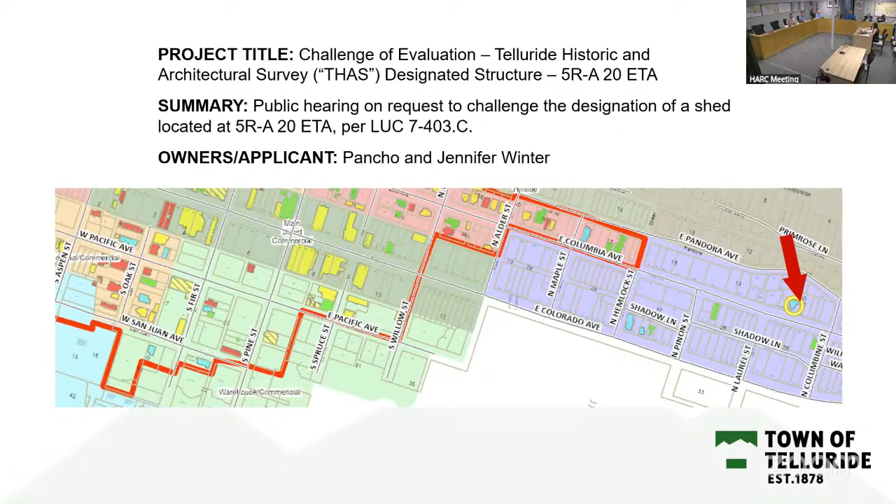The owner applicant is Pancho and Jennifer Winter. I'll quickly remind us of the procedure for a challenge of evaluation since we infrequently see these, so the public is informed. It's outlined in section 7403 of the Telluride Land Use Code. A challenge of evaluation letter was initiated by Pancho and Jennifer Winter on 4/16/25 for lot 5RA block 20 ETA per Land Use Code 7403A. Following a request to challenge an evaluation, HARC must hold a public hearing and schedule a site visit prior to the meeting per Land Use Code section 7403C. We held that site visit, as Mark mentioned, at 3 o'clock this afternoon.

Per mutual agreement, the applicant agreed to this item coming before you this evening, and it was properly noticed. Per Land Use Code section 7403D, the person challenging a designation shall have the burden of presenting evidence substantiating the challenge. Staff or any interested citizen may also present evidence as to why the evaluation of the structure should or should not be changed. At the public hearing, staff or any interested citizen may also present additional evidence within 15 days after the date of the public hearing, but most likely this evening. HARC shall make a recommendation to town council on whether or not to amend the evaluation based on the criteria set forth for evaluation of structures in the 2013 THAS.

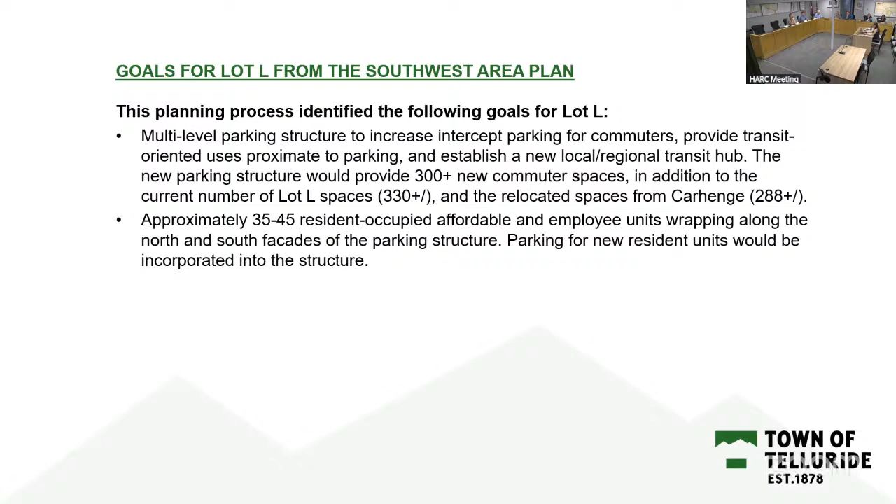In addition, approximately 35 to 45 resident occupied affordable and employee units wrapping along the north and south facades of the parking structure. Parking for new resident units would be incorporated into the structure itself. In addition, a childcare facility and associated outdoor play area.

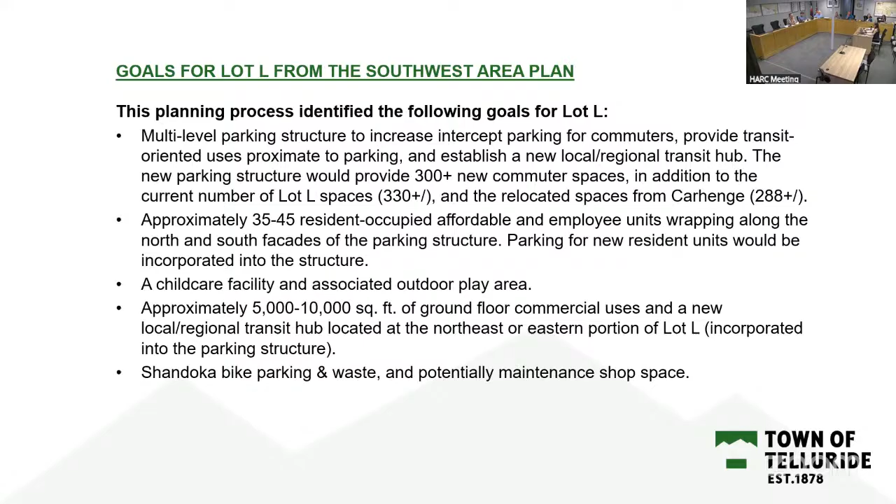In addition, approximately 5,000 to 10,000 square feet of ground floor commercial uses and a new local regional transit hub located at the northeastern portion of Lot L, which is incorporated into the parking structure, and Shandoka bike parking and waste and potentially maintenance shop space. And finally, amenities such as playgrounds, pocket parks, and public spaces.

So land use code compliance—a formal land use code compliance review will take place following the submission of a complete formal HARC application.

Prior to this work session, staff reviewed land use code requirements with the applicant specific to the accommodations zone district in depth, to ensure the applicant is taking land use code requirements and constraints into account at this preliminary conceptual stage of project design.

So we're going to focus this evening on the design guidelines. As a reminder, the overall precepts: keep it simple, keep it in scale, respect the historic resources, make all new design compatible to the existing context.

And again, we are located in the accommodations, River Park Corridor overlay, and exterior and site lighting standards and guidelines sections, in terms of what I will present to you.

For this work session, as for all work sessions on this proposed project, while it is still in the preliminary conceptual design phase, the aim is to really focus on the design guidelines that are particularly pertinent at this early stage of project design.

I provided in the staff memo the most relevant specific design guidelines, and it's more extensive than that. I covered a number there just so you would have the opportunity to reflect on some of the higher, most relevant design guidelines prior to coming into this meeting.

I'm just going to touch topically on some of those that I think will be important for you to consider. Then the applicant will present the project itself, and you will be thinking through during the work session the application of those design guidelines.

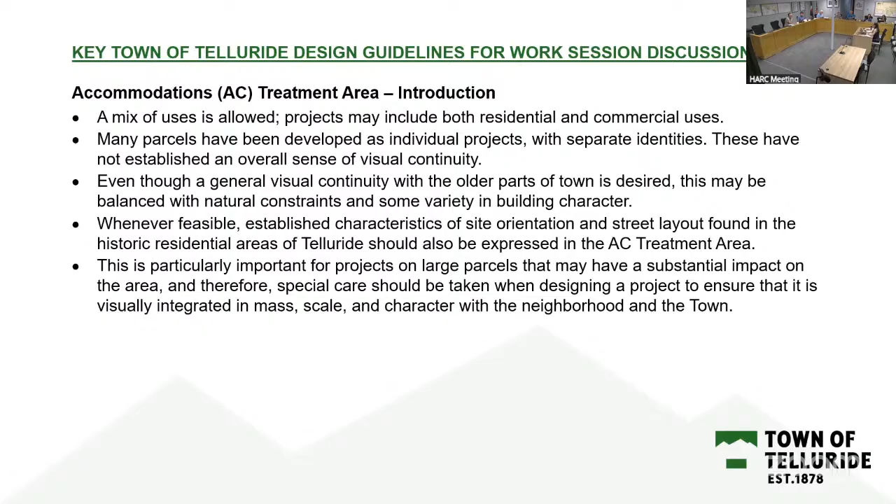This, as noted in the design guidelines, is especially important for projects on large parcels such as this one. This is quite a large parcel that may have a substantial impact on the area, and therefore special care should be taken when designing the project to ensure that it is visually integrated in mass, scale, and character with the neighborhood and the town.

Also noted in the design guidelines, as seen from a distance, the accommodations treatment area should appear to be part of the community, with essentially the same perceived street and alley arrangements, building forms, and scale of development.

This is particularly important for projects on large parcels and that span several parcels. More variety in architectural design is appropriate than in other areas, but should maintain visual continuity with the historic district. So that's just the overview of this treatment area and the flexibility within it.

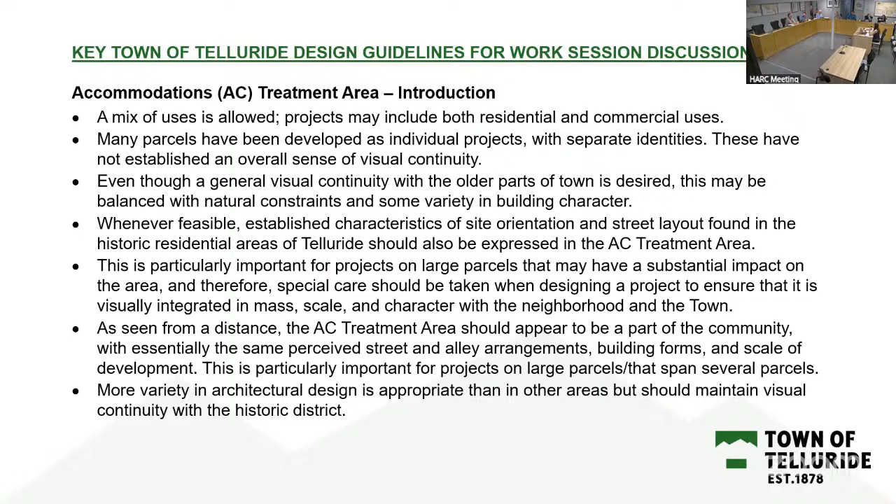I'm not going to go one by one through what I put in the memo. I'm just going to flag topics and some key points to make them fresh in your mind for the work session. So within the design guidelines, the parking design section notes that parking facilities should be located such that they are subordinate to other site features.

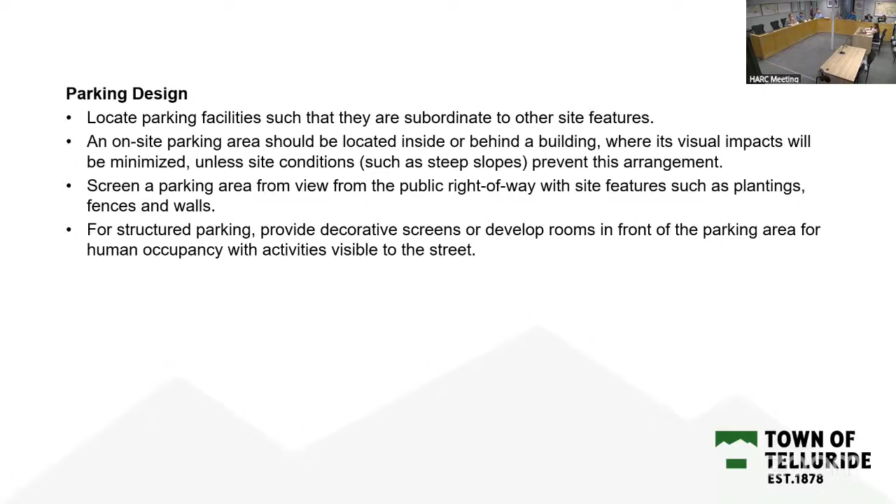An on-site parking area should be located inside or behind a building where its visual impacts will be minimized, unless site conditions such as steep slopes prevent this arrangement. The guidelines note that screening a parking area from view from the public right-of-way with site features such as plantings, fences, and walls is important. For structured parking, provide decorative screens or develop rooms in front of the parking area for human occupancy with activities visible to the street.

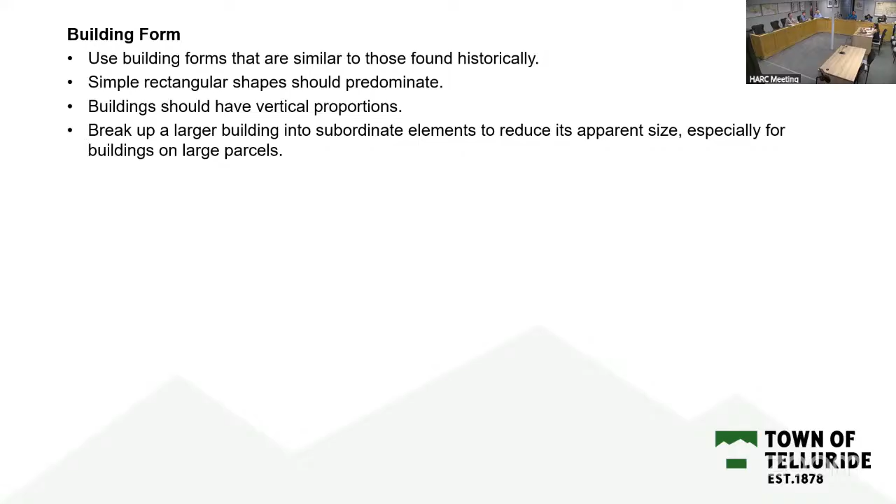So thinking through building form, I'm just pulling out some key points that relate to this evening's discussion. Use building forms that are similar to those found historically. Simple rectangular shapes should predominate. Buildings should have vertical proportions. Break up larger buildings into subordinate elements to reduce its apparent size, especially for buildings on large parcels. Provide articulation in the wall planes to break up mass and scale.

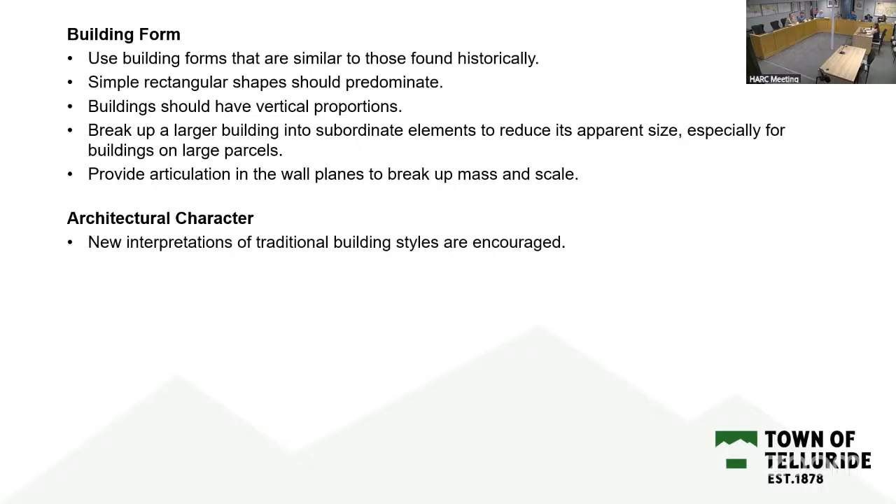For architectural character, some key design guidelines: new interpretations of traditional building styles are encouraged. New designs shall draw upon the fundamental traits of historic buildings without copying them. This will allow them to be seen as products of their own time, yet compatible with their historic neighbors. Applying highly ornamental details that were not a part of building in Telluride is inappropriate.

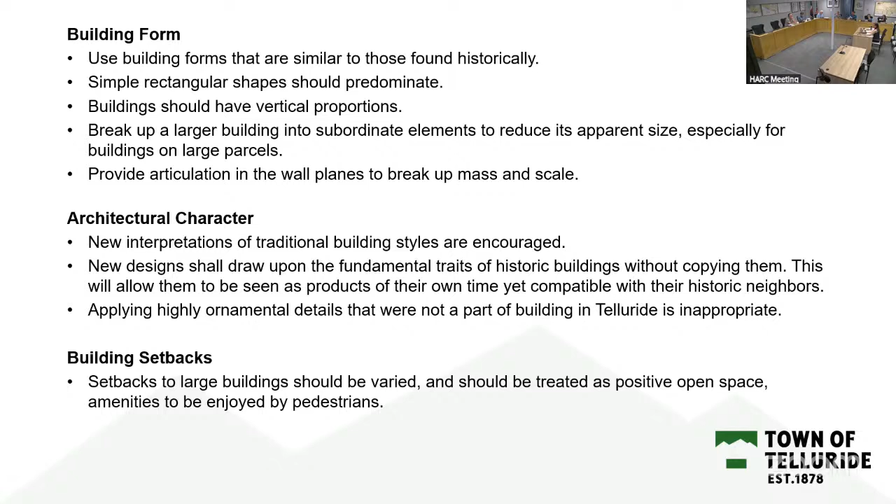And building setbacks: setbacks to large buildings should be varied and should be treated as positive open space, amenities to be enjoyed by pedestrians. So those are a few, and now I'm going to get into just a handful more, and then some big picture items.

Relationship to the town grid: I said this at the very beginning, respect the established town grid in all projects. Pedestrian scale: develop the ground floor level of all projects to encourage pedestrian activity. Provide amenities that will encourage pedestrian activity through the area.

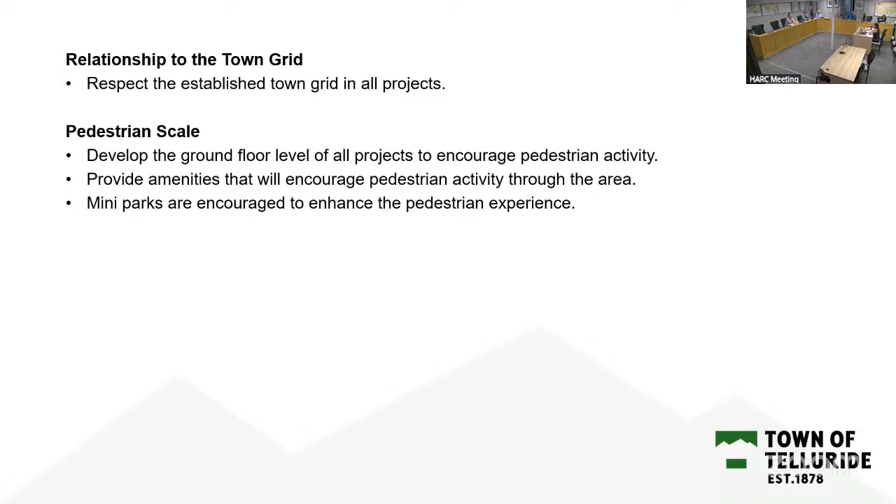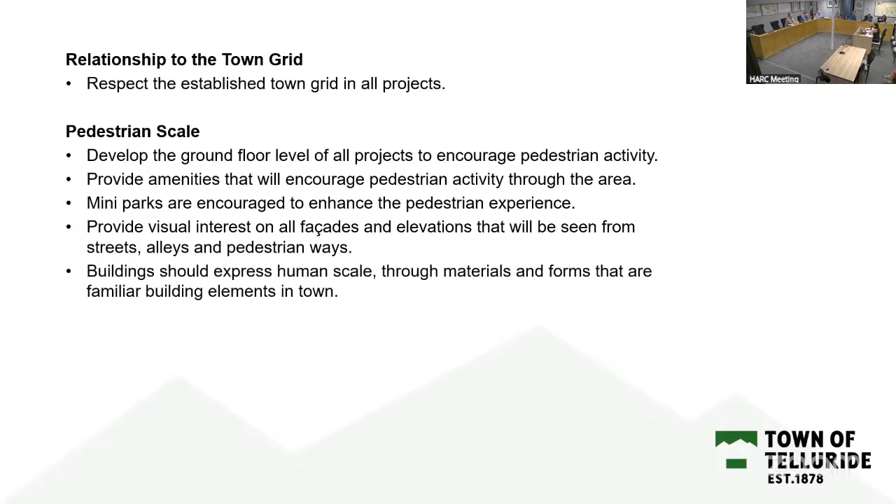Mini parks are encouraged to enhance the pedestrian experience. Provide visual interest on all facades and elevations that will be seen from streets, alleys, and pedestrian ways. And importantly, buildings should express human scale through materials and forms that are familiar building elements in town. Use native plantings, rock walls, fences, and other landscape design elements that provide scale, color, and texture and maintain a human scale.

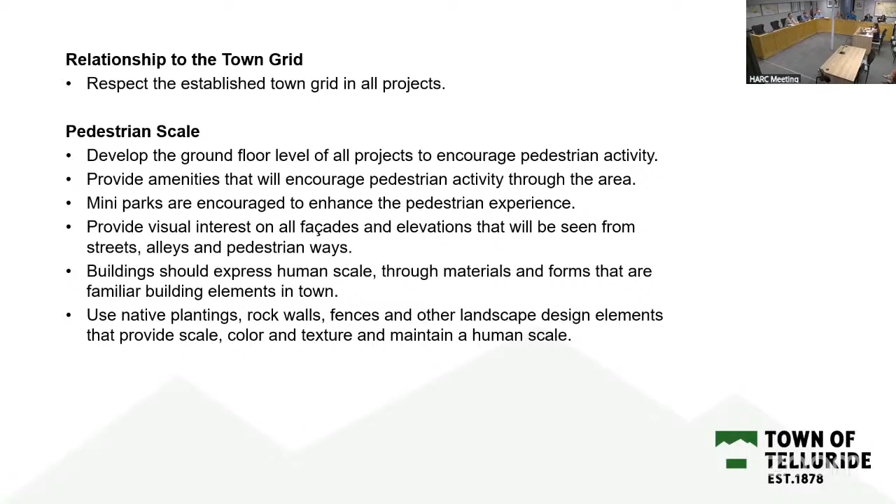A few others before I get to mass and scale more broadly, and that will be the last one I bring forth. Views: the guidelines include positioning a new building or addition so that the public view corridors are preserved, and to maintain spacing between buildings that respects existing views, open spaces, and solar access. And it notes that views through private property are not insured or protected.

For positive open space: create places with distinct identity within projects, connect open spaces among large projects, provide positive open space within a project, and provide open space in commercial projects that would be perceived as a public amenity. So those are some of the guidelines that very closely apply to this project and that are very important for consideration.

I'm going to wrap up by reflecting on the mass and scale guidelines that are very applicable to this discussion. Use building sizes that will appear to be similar in scale to those found historically in town. And at the western gateway into town, which this is in that space, buildings should appear to be similar in scale with the town, which is generally a variety of 1 and 2 stories, but a 3rd story may be considered if it is set back from the street and alley. The heights of buildings should vary, but may increase closer to the mountains.

A primary building facade should not exceed 50 feet in width without a significant setback. And we go through the primary facades that exceed 50 feet, which should be differentiated by significant setbacks in the wall plane, creating positive open space in these setbacks such that they will enhance the streetscape.

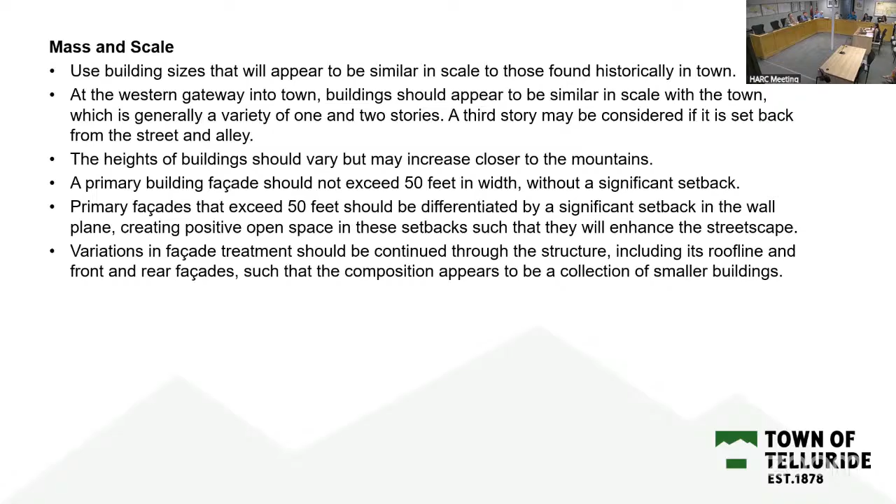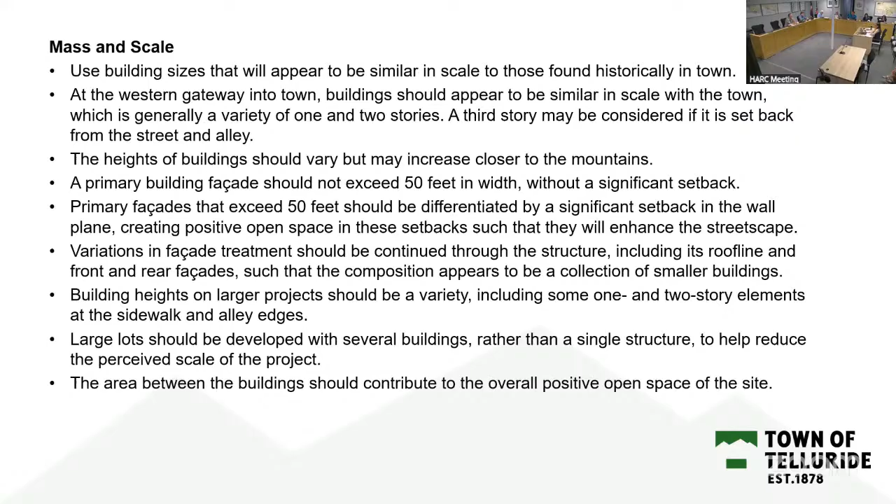Again, the emphasis is on variations in facade treatment, continuing those through the structure, through the roof line and rear facades, such that the composition appears to be a collection of smaller buildings. For building heights on larger projects, the guidelines state there should be a variety, including some 1 and 2 story elements at the sidewalk and alley edges.

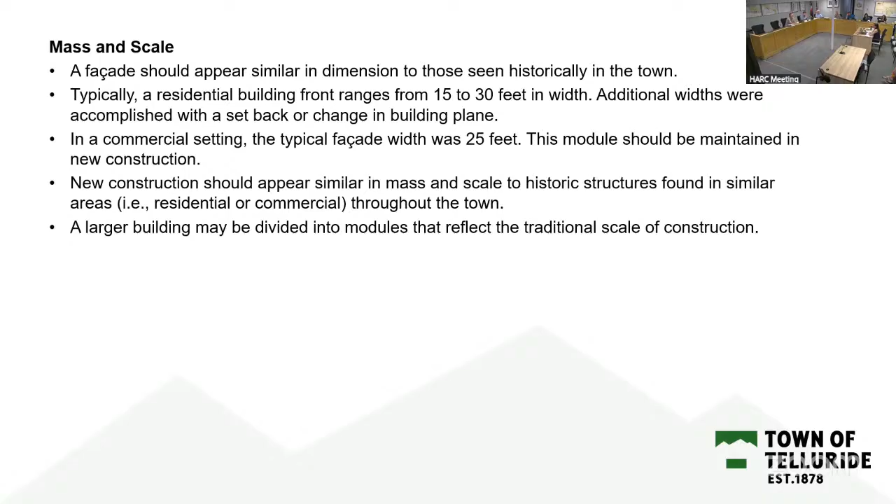Again, the facade being similar in dimension to historic examples. It provides some guidance on appropriate widths. Same goes for commercial widths that are historic and recommended in terms of mass and scale, similar to residential or commercial throughout town. There's a recommendation for larger buildings to be divided into modules that reflect the traditional scale of construction.

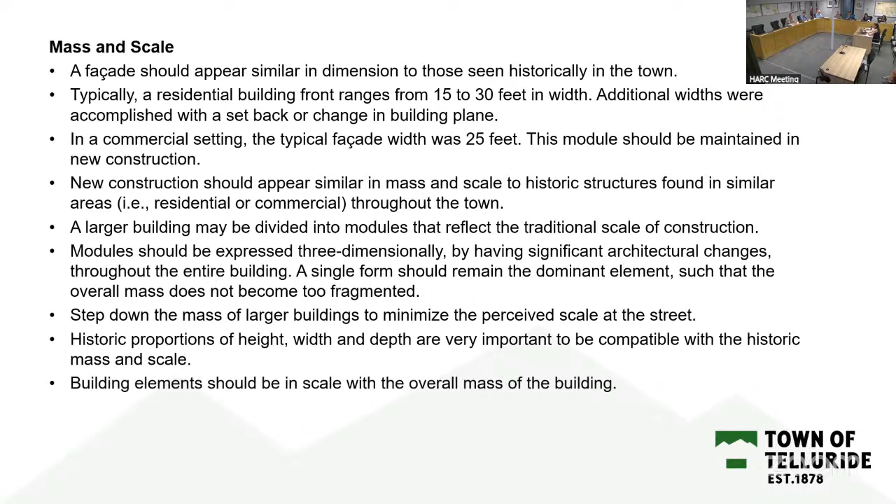And we've talked about significant architectural changes throughout the entire building, stepping down the mass of larger buildings to maintain and minimize the perceived scale at the street, with historic proportions and building elements in scale with the overall mass of the building.

The other overlay that applies to this project, which we'll get into much more depth with during the formal HARC review when a formal application is submitted—but since this is a work session, I'm just going to flag a few items within the River Park Corridor overlay. The architectural character guidance notes to provide the same attention to detail on facades that face the river trail as those that face the street. This project faces the river trail.

Mass, scale, and form articulation is emphasized there as well, to break up the perceived mass and scale of larger, taller buildings, with setbacks to minimize impacts to the trail. Views: positioning buildings and features in a way that protects, enhances, and highlights views to peaks, waterfalls, the river, creeks, and other important features, providing views through the site to the River Creek, and protecting views along the River Trail and River Creek corridors.

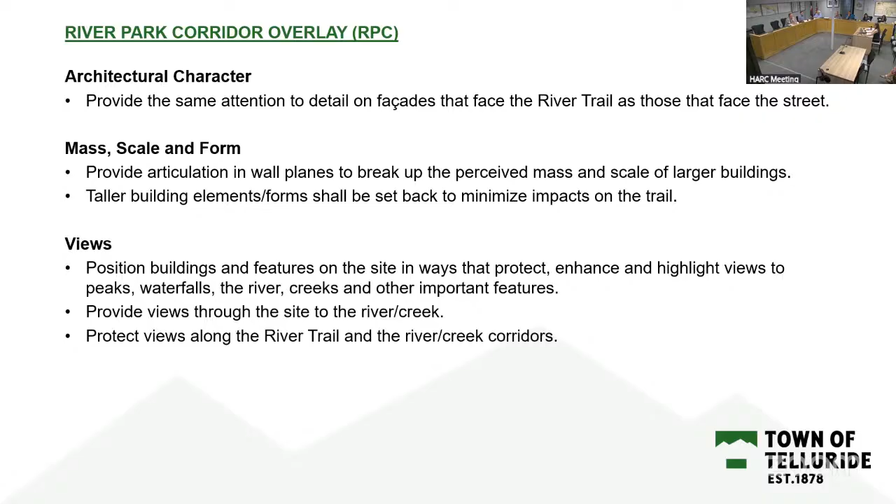And finally, positive open space—providing substantial open space within projects that will enhance the natural character of the area. I'm flagging these because the applicant is going to share some preliminary conceptual designs, and I want these particular elements to be top of mind. There's much more detail in the staff memo for your reference, but as you look through what the applicant presents, think about whether they are consistent with and coming into compliance with the key design guidelines that apply to the project.

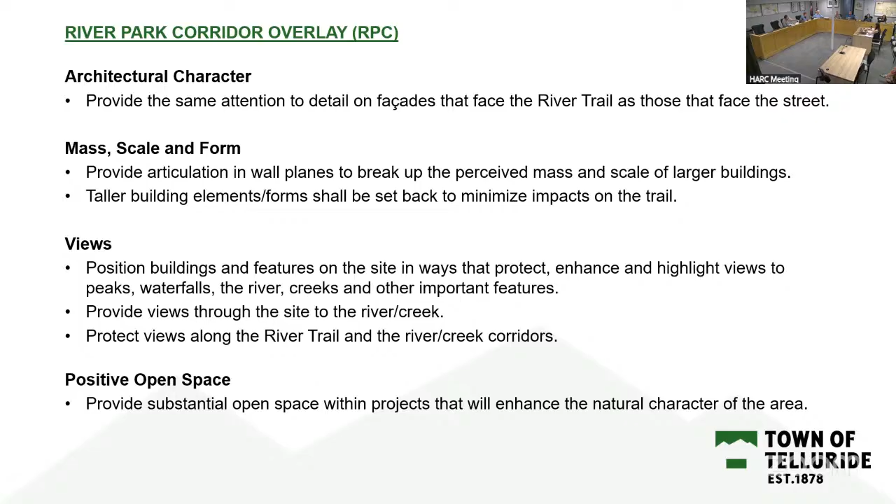I do want to remind HARC that the focus this evening, while there is a broad Southwest area conceptual plan, this work session is very focused on Lot L specifically and on the role of HARC and your purview within that review. So finally, your requested action at a work session is to provide general feedback on the information and options presented by the applicant in this preliminary conceptual design phase. Your review this evening is not intended to vest the applicant or public with any reliance as to the outcome of the formal development review process, per Land Use Code Section 5201C5.

I'm going to end here. The applicant will present the project rather than me presenting it, and then I'm available for any questions you may have later in this discussion.

I just have one question, and that is—how many meetings did you have with the applicant to try to guide them into compliance? You've enumerated all the relevant guidelines, but that's not what they've drawn even, and it's just preliminary. But certainly, how many meetings did you have to try to guide them?

Certainly, I can speak to that. Staff in other departments have also been meeting with the applicant, more than I have—in particular two staff, and then myself. I've met with the applicant, I'm hoping I get the number right, at once initially to give a very high level review of relevant land use code compliance items, as well as relevant design guidelines in depth. I presented those to the applicant and then met maybe 2 or 3 times along the way to give additional feedback, which it was the applicant's decision how to incorporate into the project. I'm not providing my recommendations during this meeting because it's a work session for HARC.

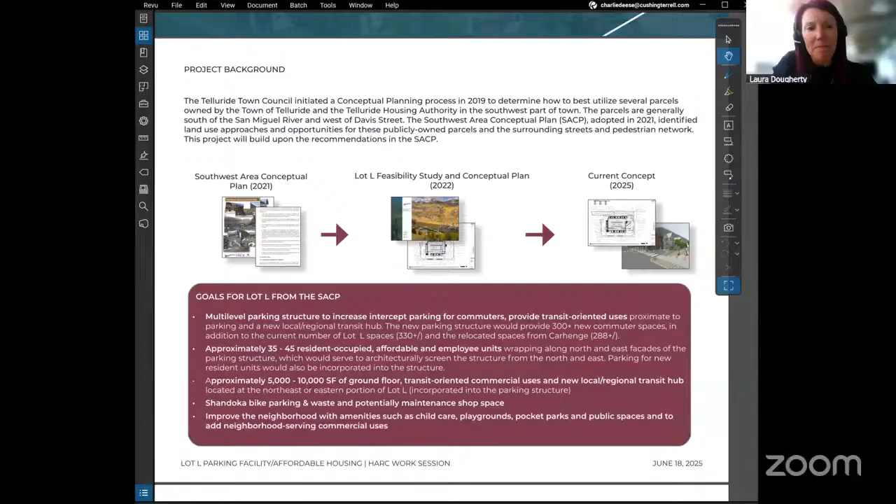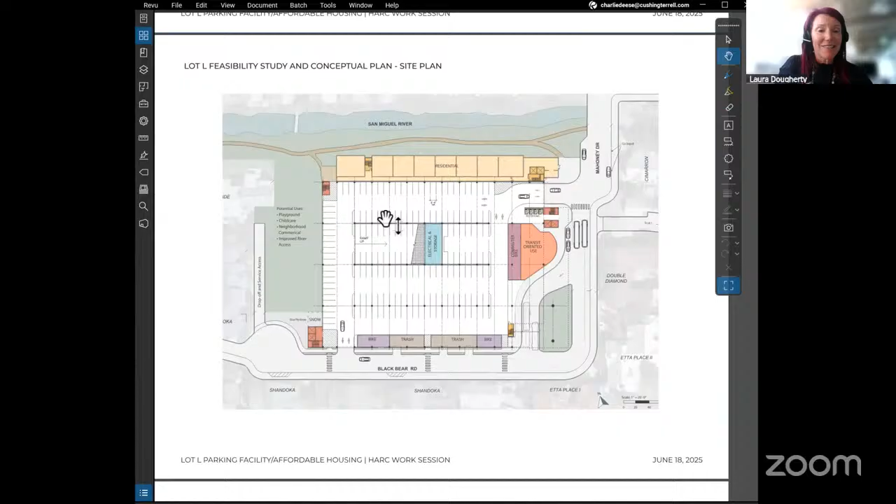So the feasibility study, this is where it was left off in 2022. This exercise showed that the program could fit. We heard during outreach that the potential uses you can see identified floating out there in the green space were important to the neighborhood.

And those uses were not incorporated into that plan. Overall, the footprint was very large. It effectively went streetscape up to the berm. Even with that large footprint, it didn't really address the streetscape. It did not yet include that wish list of items floating out there currently in the green space, and it fell a little short of the targeted housing count.

So that is where we left off, and we are now charged with how do we fit this program into this site and begin to address all of the concerns that Kristen brought up - mass, scale, and all of those important things about how to make this neighborhood feel like a neighborhood.

So Charlie, I'm going to let you do the heavy lift. Thanks, Laura. We'll talk about the evolution of the site plan first as a precursor to talk about articulation of the building. But I think a lot of this hits at the heart of how we try to address the guidelines. So some of the highlights are from the previous feasibility study.

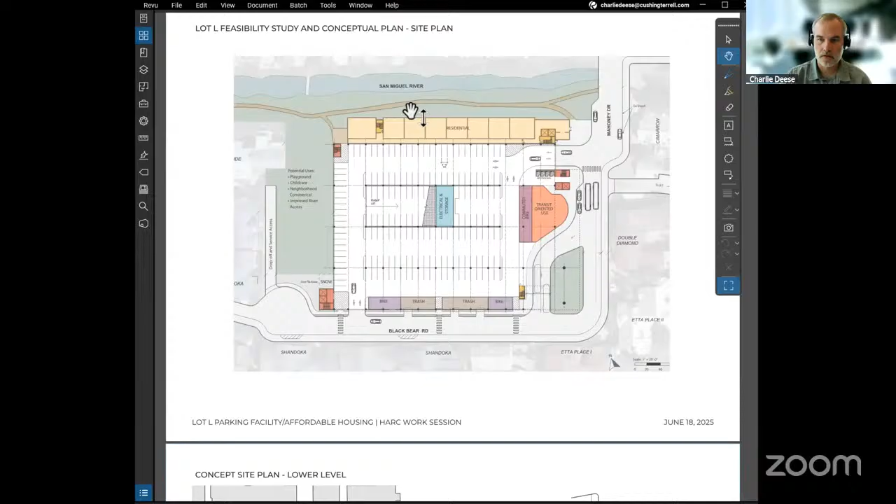You can see this is a 4-bay garage. I want to highlight the width of the building, or depth of the building, north to south here coming off the river.

Our biggest change since the feasibility study was to look at a 3-bay garage. When we get into the ability to recess portions of the facade, make material changes, step back mass, we needed that elbow room on the north and south of the building. This also goes to some of the parking guidelines where we're really trying to shield the garage - we can't do that if we can't wrap it. So going to the 3-bay garage...

The way we accomplished this was sinking a portion of it into the site and adding a level. So one of your questions earlier was how many levels does it have - we have 4 covered levels and then parking on the roof, with one of those levels submerged. These levels are not synonymous with floor-to-floor height.

So when we look at our perspective images today, you'll see the building wrapped in 2- and 3-story structures. Those don't correlate to the garage behind it. We're able to go less in some areas on the ground level, a little bit more in others.

So in making this a 3-bay garage, you can see north to south the garage itself is taking up a lot less depth off the river. This gave us additional setbacks off of the river trail.

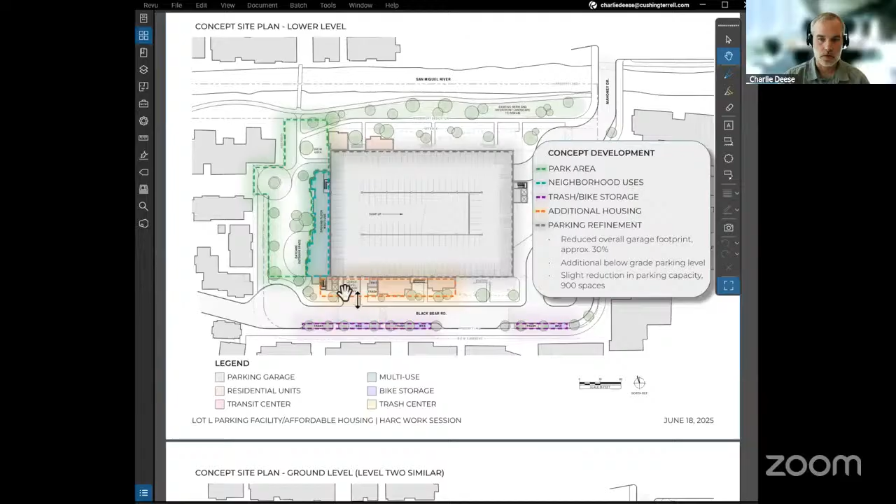So this is our lower level plan. What I want to focus on is what we're calling our ground level plan. Really, this is the second level of the garage - more or less on grade as you cross the river on Mahoney. This is where we're having the transit center, a shuttle turnaround, and entrance into the garage.

To the greatest degree possible, we're trying to be very intentional and functional with these driveways, and also minimize their presence, or at least contain them to just a couple areas so that we can wrap the building as much as possible. That gives us the greatest opportunity for articulation, depth change, material change, and just shielding the garage.

So a lot of our back and forth was making sure we're still getting enough room at the east side of the site to get our streetscaping in, align safe pedestrian crossings, and still have room to improve streetscape and sidewalk on the other side of Black Bear and Mahoney from this new structure.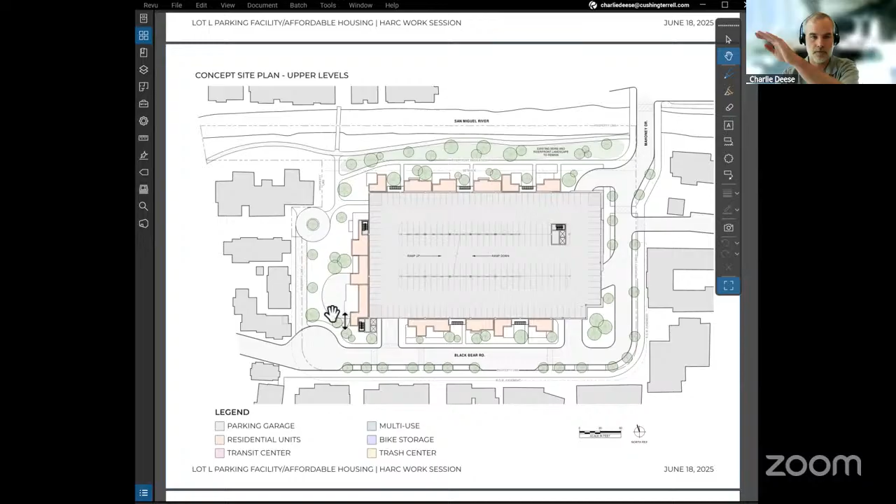Right now, if you were to go on site, that existing surface lot comes a lot closer to these Shandoka buildings on the west side. So regaining a lot of that space, giving it back to the public, and leaving us enough room to provide some building articulation and step back vertically into the garage as we conceal it.

I'm going to run you around the building counterclockwise here with some more pedestrian level views. This is coming across Mahoney Drive over the bridge. What you're seeing in the foreground is the vehicle entrance into the commuter portion of the garage, entering onto the second level. You can see what's wrapping it - not all of this is functional building space behind it, but it's meant to look like that.

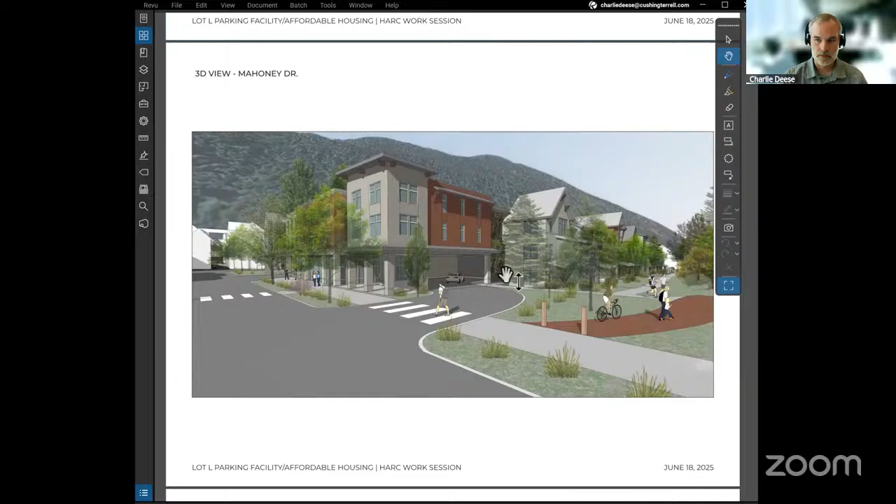So again, concealing the garage through screening, through what the guidelines would call rooms. Some of that is functional at the transit center. Then as you go west along the river, this is representative of some of the residential massing. We'll get into some other views where I'll talk a little more about the approach there.

This is a view kind of straight down that secondary pedestrian access through the site. The berm kind of conceals the river trail. We believe that none of the plantings creating that dense coverage of the river trail would be affected by the project.

You can start to get an idea of some of the step backs off the river trail - ground level up to second, stepping back more with third. We're using our vertical circulation to spread units apart and create little courtyards, planted areas between some of the residential units, so it's not just stacked together, creating density without any breakout along the length of the building.

Also looking at a variety of materials, variety of roof forms. One of the things where we'll definitely want feedback is whether there are unifying elements, details, materials - or as we look to break up this facade, do we really want to treat each of these sections as if they were separate buildings, knowing there's a garage behind all of these that's unifying them regardless?

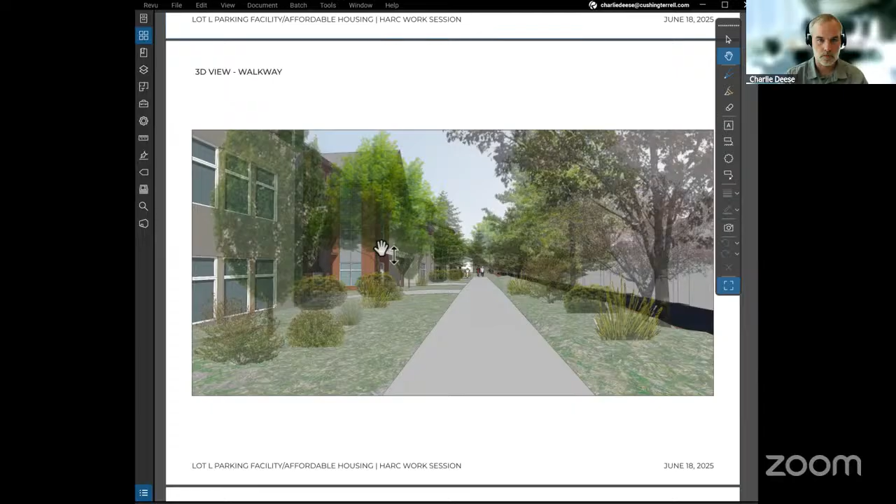So this is our northwest corner coming off of the river trail - just opposite of where the camera view is at the pedestrian bridge, looking back to some of the Shandoka buildings.

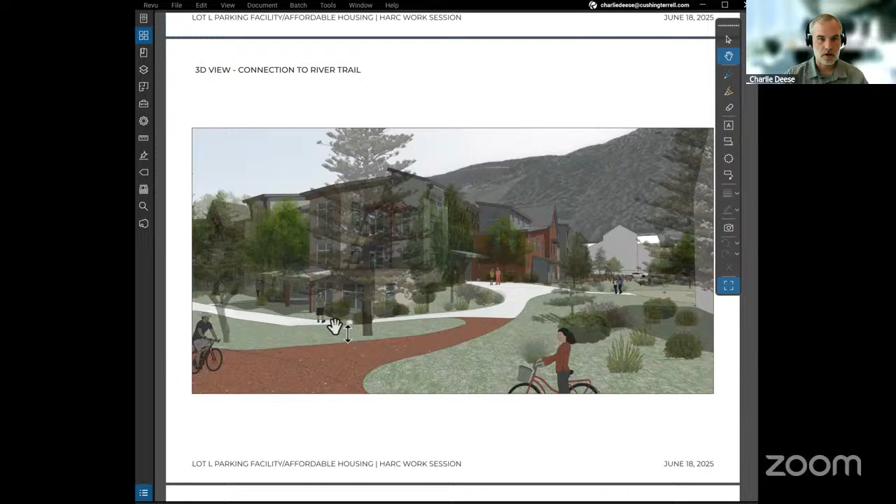One of the other strategies we've been thinking about is that idea of each building face having a unique character, one to the other, leaning into different vernaculars to create some variety. So could we be doing too much, too little? That's something we want to talk about today, knowing this is concepts and not highly articulated drawings at this point.

This gives you an idea, looking north towards the river. We've got some of the Shandoka buildings on the left.

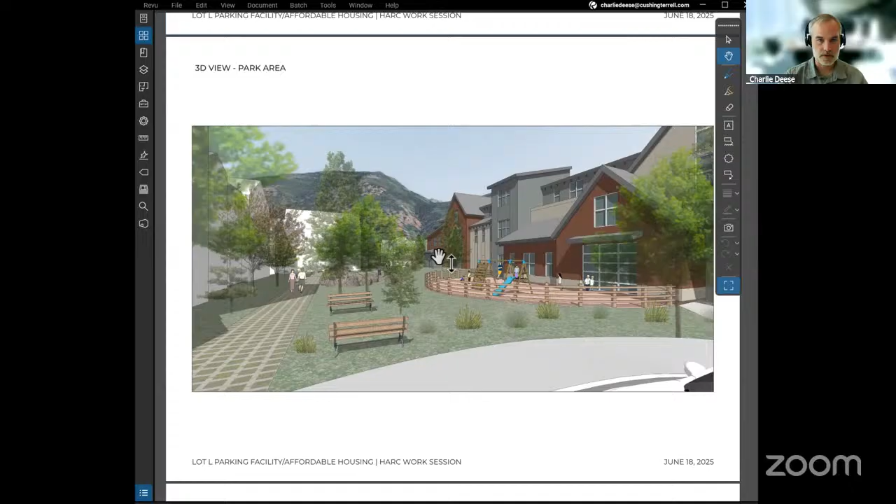As we mentioned, some of the other uses other than parking and residential could potentially be daycare. So this is just a view of what that might look like with daycare on a ground level with dedicated outdoor space required with daycare licensing - just giving that sense of scale of what you could do with a park space like this.

This is that turnaround. Sorry, was there a question? No, I was coughing. No. Okay.

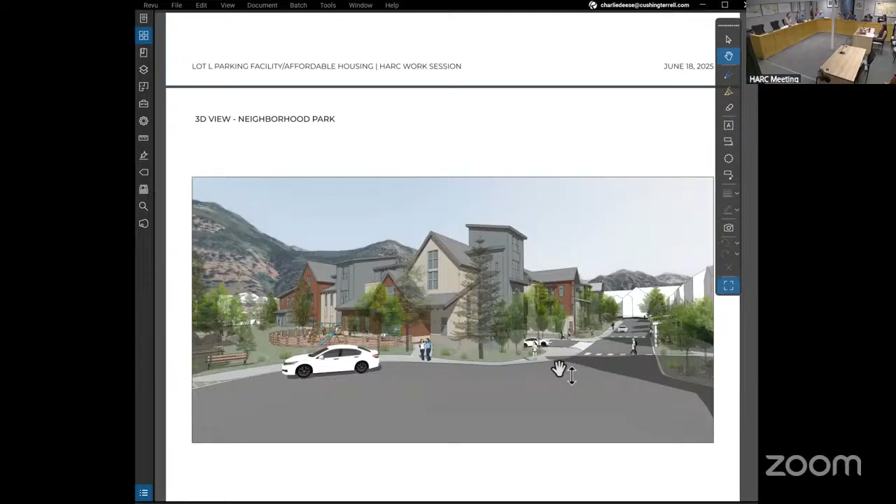Sorry about that. So this is looking east along Black Bear. From a height perspective, really pushing to keep it almost mirroring the other side with the existing buildings there - not necessarily mirroring all the character elements, materials, but with the massing and scale, having something really familiar wrapping the garage there.

This is the opposite view, looking west down Black Bear. The majority of this is residential use wrapping the garage on the south side of the structure. Similar approach to the north side in terms of breaking up units and spaces between units with landscaped areas and vertical circulation courtyards there.

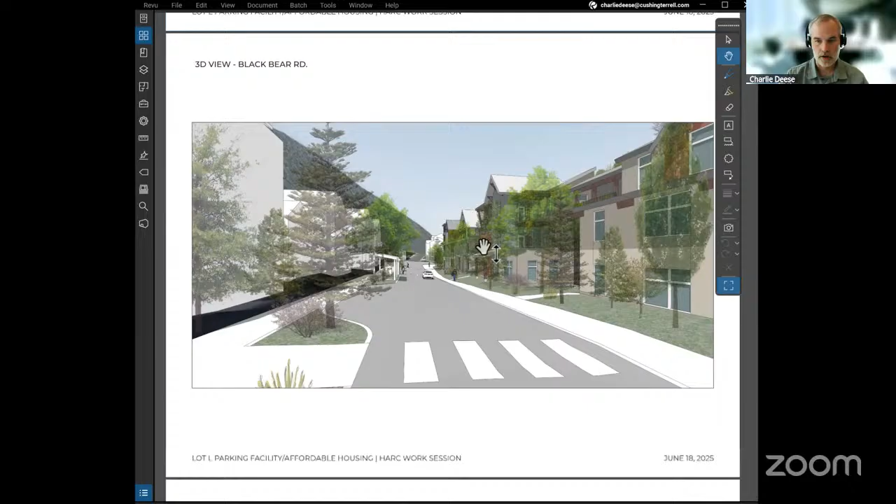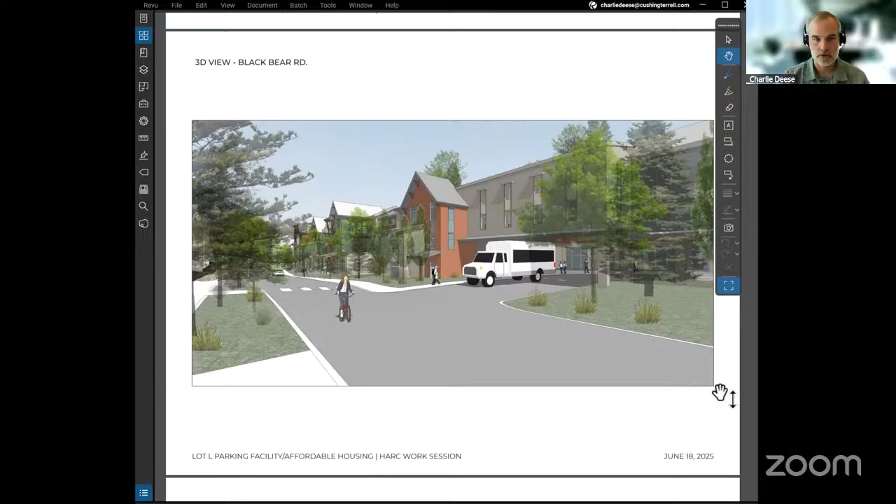This is right where Mahoney turns the corner, catching a glimpse of where the shuttles make the loop coming out of the space. You get a sense for the streetscape, the ability to do some street trees and plantings, and then the widened sidewalk - 10 feet - hugs the whole south side of the site, wraps around, connects you over the Mahoney Bridge back to the trail for residents.

And this is another conversation area. We have the transit center that is more of a commercial use, and looked at the potential of a commercial treatment there. Certainly that could be maybe more reminiscent of some of the other architectural forms and materials around here, but wanted to put that out there for conversation as a commercial use, as a public use. Do we draw some attention to it as such and kind of lean on consistency with our streetscape and pedestrian circulation to tie it to the rest of the neighborhood context?

Here you can see in a little bit more detail some of those screening elements of the garage, where we can bring in a variety of screening materials, also the potential to do some plantings there if we can find something that works in that environment. There's a couple examples around town where it looks to be working well.

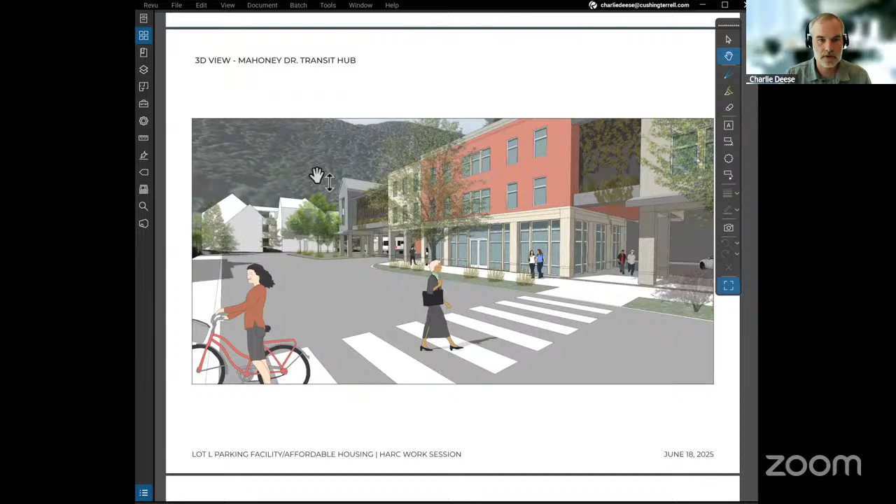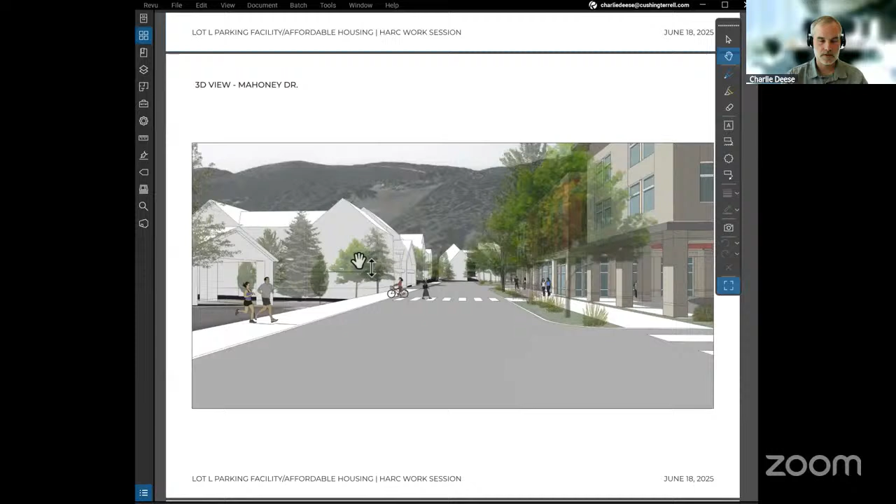And then this is just back to that first corner view. So this is looking south on Mahoney, Cimarron kind of in the foreground left there. Really careful attention to alignment of pedestrian crossings there coming out of the garage and trying to limit interactions with the cars that are coming in off of Mahoney.

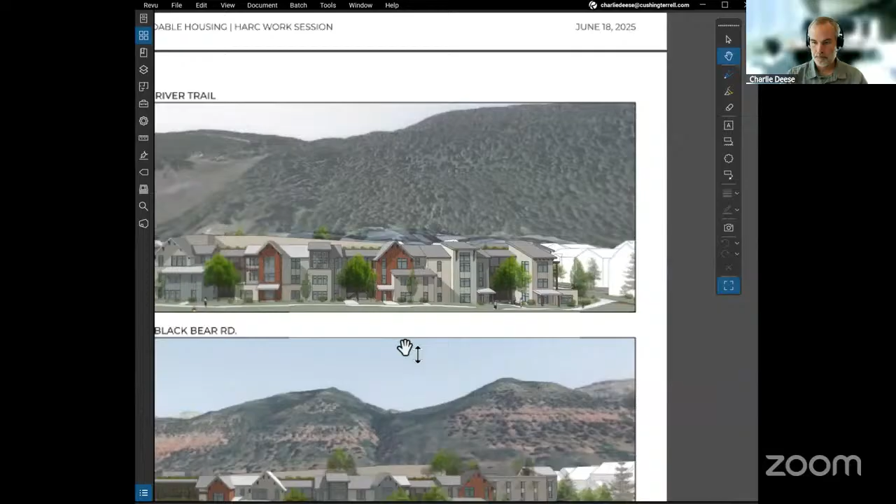It also kind of more clearly illustrates some of those small courtyards between some of the units. And you can also see in this, the south and the north elevations are fairly similar in terms of the residential treatment. We don't want to imply that this is by any means final, other than that there's just a variety and stepping of forms and materials, kind of a step back at the second and third floors, and just one way to potentially approach that.

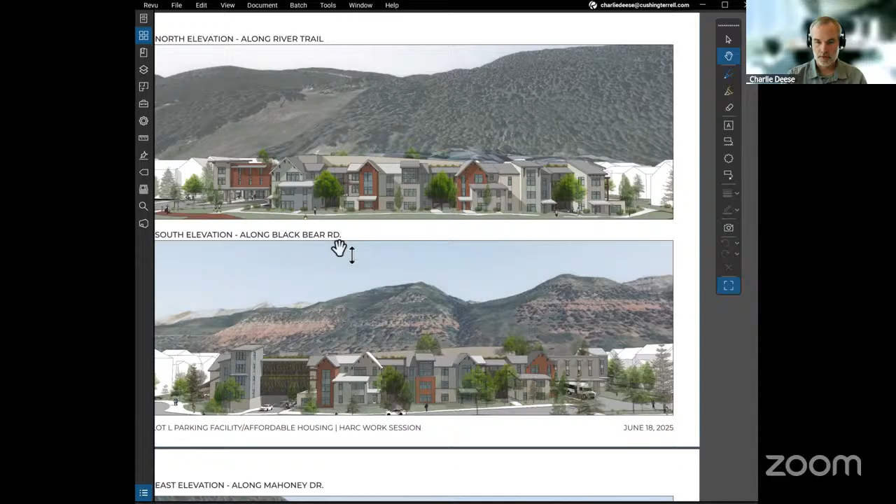The next one is just more the kind of head-on views of the east and west. So again, with the east in the middle of the structure here, that's our transit center, our bus loop on the left, and then the commuter lot entry on the right coming off of Mahoney.

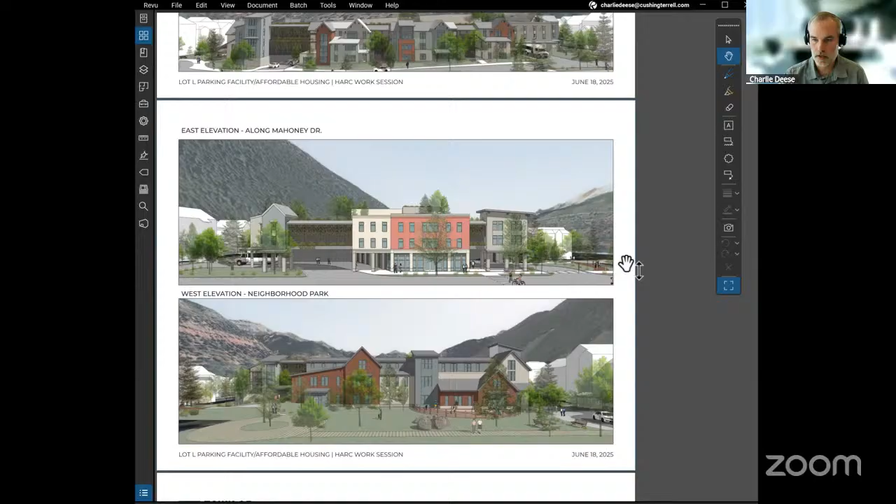And then on the west elevation, our neighborhood park in the foreground, and then the architectural treatment behind it, ground floor being a mix of potential commercial use or daycare, and upper floors then again going towards residential units.

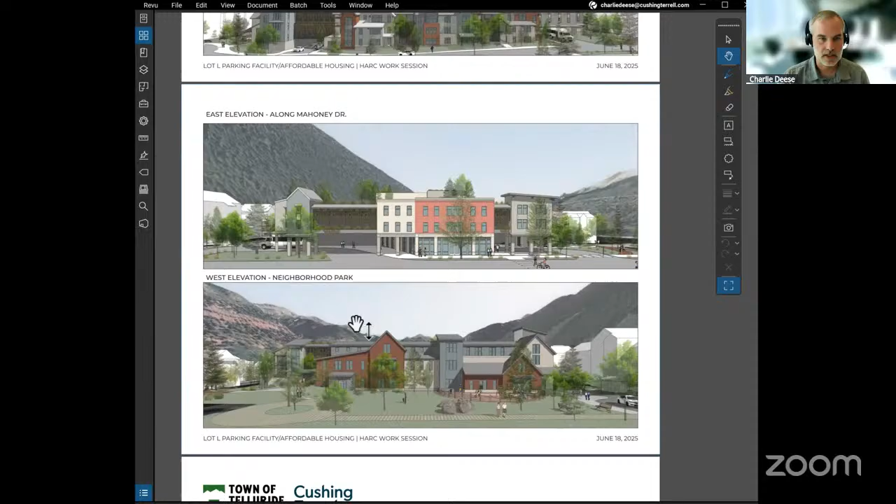So we didn't want to belabor our presentation, and just wanted to get through this quickly and get to the discussion portion, because this is a first stab, as Kristen mentioned, with just a handful of opportunities to discuss with her and other city staff, and know that a lot of work is to be done, and want to do it with y'all.

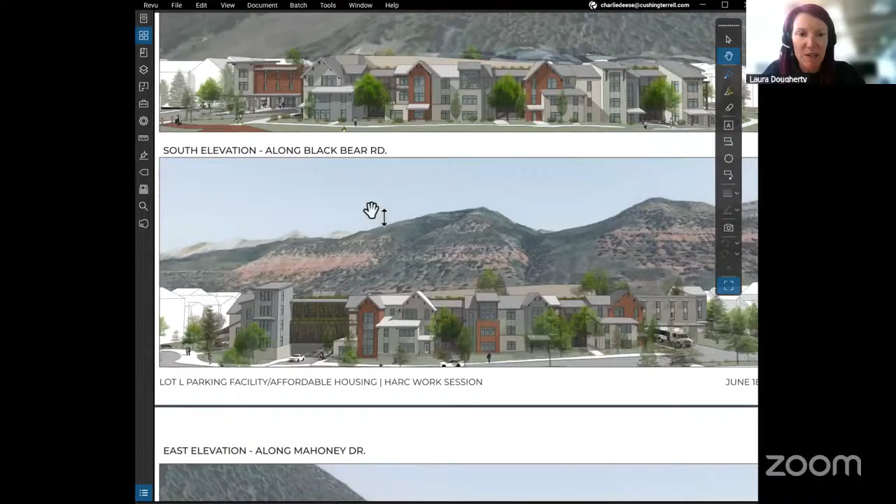Now, Charlie, I think that actually ending on these elevations is a good point where we can also illustrate. I just wanted to briefly point out the creation of these streetscapes, the care that went into those safe pedestrian crossings and separating vehicle transit from pedestrian transit, but then really that residential character along Black Bear, and those separations that went into those, and that widening of the south side there on Shandoka, and then really that creation of those spaces you're showing there along Black Bear—that was a big part of the creation of the neighborhood, because that begins to be that experience, that separation of the street widths, the kind of sidewalks, then really that ability for snowplow, snow storage, that a lot of that sizing and distances went into this as well.

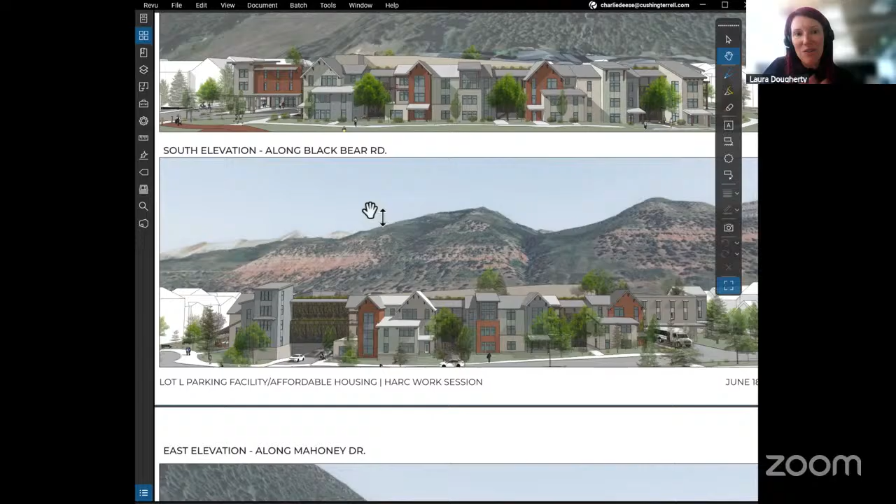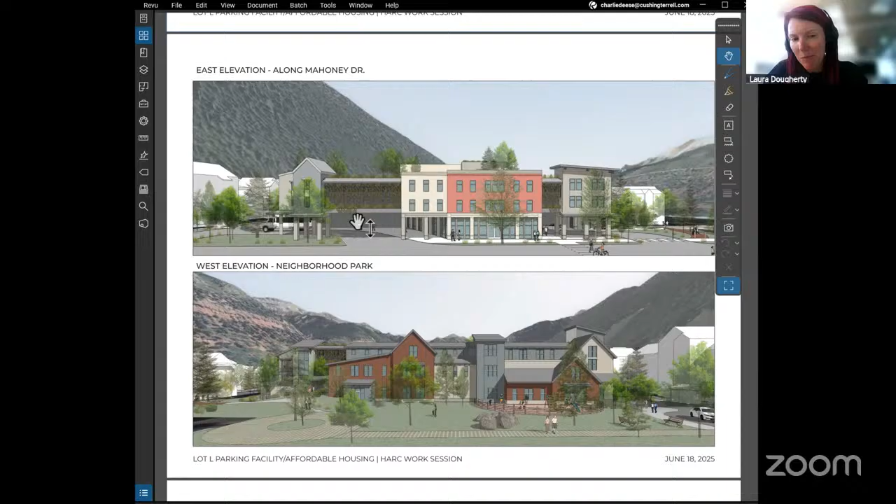And then how that changes, that more natural character you see there along the river in the elevation just up there, that's a different approach, how it relates to the pocket park. And then, as Charlie pointed out, that streetscape along the east elevation on Mahoney—again, those distances, sizing of sidewalks, sizing of tree line, and really having those setbacks feel like that appropriate two-sided neighborhood experience streetscape. So just wanted to end with that thought as we get your feedback.

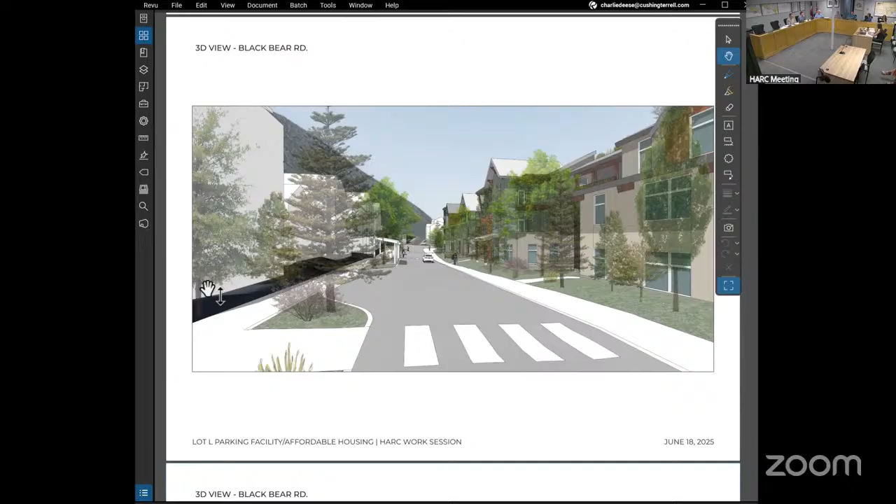I would like to go on the east elevation particularly - it has a very commercial feel to it. I know there's nothing residential there; it's the garage that you're looking at, and they've broken it up, but it still has that character of a main street that just doesn't fit there. Yeah, storefront probably isn't the vernacular that needs to be there. I think I do appreciate them trying to break it up and considering what little bits of residential pieces you have there, but still it does need to be broken up.

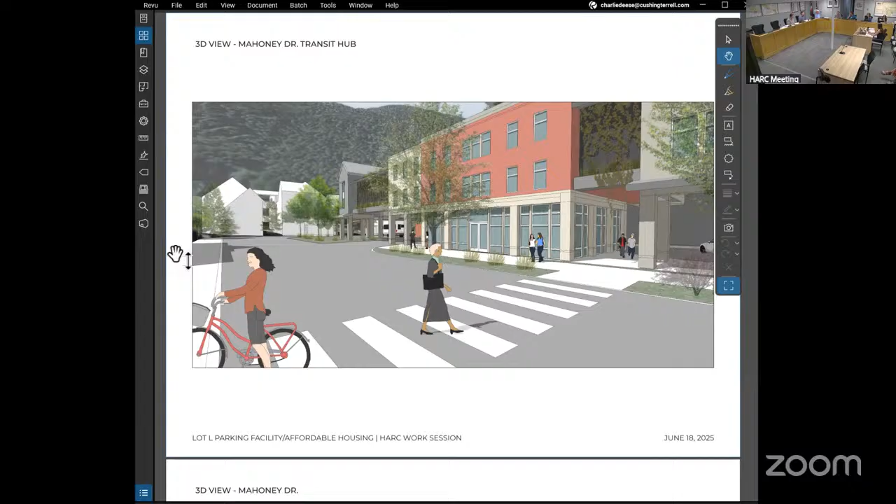And I think somehow deal with the third level setback to reduce that scale, particularly along the river trail side. I'm really concerned about that. I use it a lot and like to see that have a much more broken up scale to it.

There's some other things that I wouldn't expect us to get into at a preliminary stage, so don't just take this as me being forward looking. There's an opportunity, I think, on that upper level - right now it's not covered at all - for some creative photovoltaic solar. I see a really tiny snow storage area on the northwest corner.

That's probably not sufficient - I don't know how many spaces, 900 divided by 5 - for that many parking spaces, a little tiny snow storage area is probably not sufficient. Some covering there, some way to maintain and hold snow until it naturally melts, would probably be a good idea. And would that add to height? Maybe, but unless it's in the center of the lot - there's a lot of directions to go here. I understand this is preliminary, we can't expect you to develop an entire project at this stage, but yeah.

Let's just keep going down the road because I have questions and I'll comment at the end. Any comments related to what's been said or add to?

Well, I'm in agreement so far with what everybody else has already mentioned. One of the things I would like to see more is how the traffic's going to impact this area. And as everyone's mentioned, I am very empathetic to the applicant and what they're trying to do. But I think getting 900 something parking spaces in there and being compliant with our design guidelines is an extremely difficult process. So I'm sitting here trying to think of solutions on how we can make something like this work and meet both sides of it.

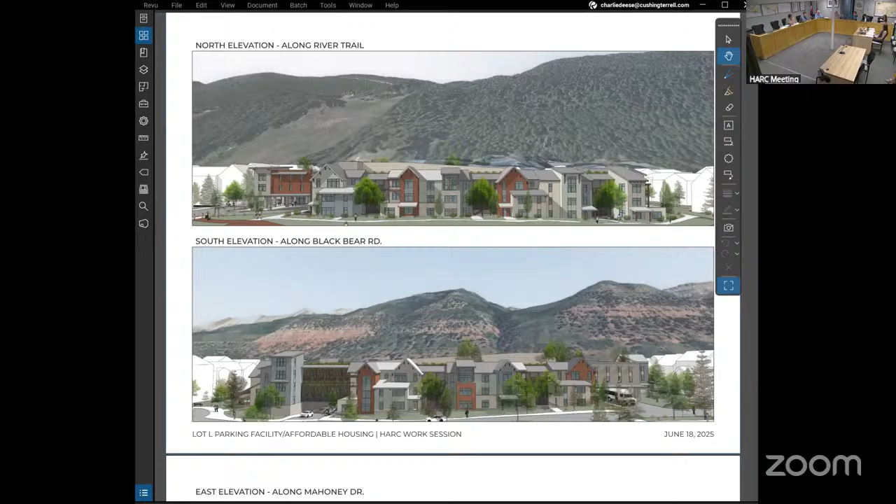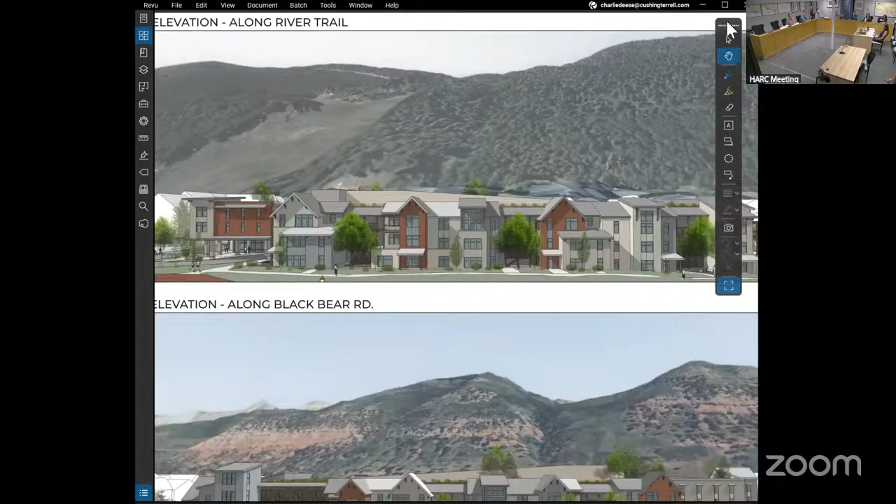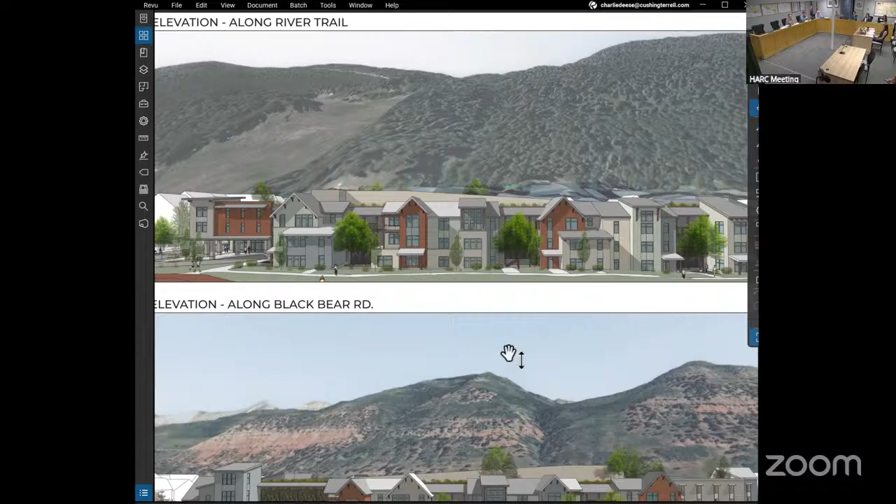Okay, let's move on. Why not put more in the concentration of... and then I'm going to get to a really big picture question in a second, which I need the board's help with. Could you blow up that top elevation there? Why not put more — this won't show it — you've got a lot of housing on the north and south, but it's kind of tempered on the east and west. I guess the transit entry steals all that space, but you couldn't get any more units on the other end? It doesn't seem like it, unless I missed it — was it completely on the north, east, south, and west? East and west is limited.

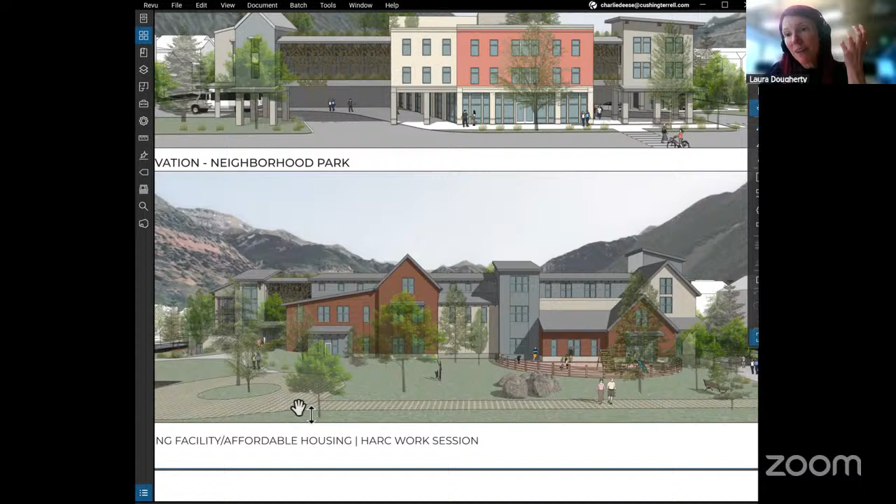We were really looking to preserve a meaningful park area, by creating distance from those existing units, really pushing that building farther back. So there was a lot of discussion as we did push and pull that end, but we felt that open space piece was really critical for that neighborhood that currently doesn't have green space. Okay, that's a good reason. And I think that elevation, the neighborhood park elevation, is probably one of the most articulated ones in the project, and to me is the best.

Real quickly, I did notice, it jumped out at me, I underlined it — Kristen didn't necessarily add this to her list in the open space section, but it does say at the end of the intro: undeveloped land that is left over after a building is placed on a site is usually insufficient to function as positive open space. This struck me, it's nice, but it seems to me like it's just the westerly portion that's left over after the parking, after you reach 900 spaces. I would agree with that. We can go back to the first plan, we can take up the whole thing. And I'll just reiterate, the word 'within' or 'between' is used 1, 2, 3, 4, 5, 6, 7 times in the positive open space guideline. Within or between — and this isn't that.

Another question: you assumed all 288 cars from Carhenge would have to come in here, but surely it would be reasonable to assume there'll be some underground parking in that development for the affordable housing over there. It's just the responsible thing to do. I know they're in the water table, just like the private developers right next door in these other buildings who have underground parking using raft foundations. So it's time to bite the bullet and say, why would you need to use all 288? Why wouldn't you consider, let's say, half of them — and this helps with mass and scale. The Carhenge development — all of the parking built on that site will be for the structures built there, so there won't be extra parking for commuters. Okay, so it'll be for the residents. Yeah.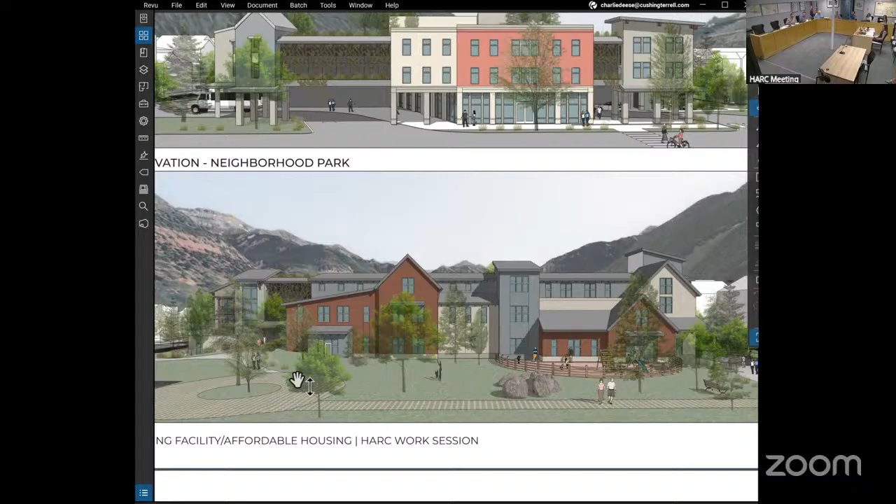And again, I'll say it because it came up in almost all the public comment letters. Certainly there will be a traffic study and that's important, but it's not my purview as a HARC member to consider neighborhood impacts on traffic flow.

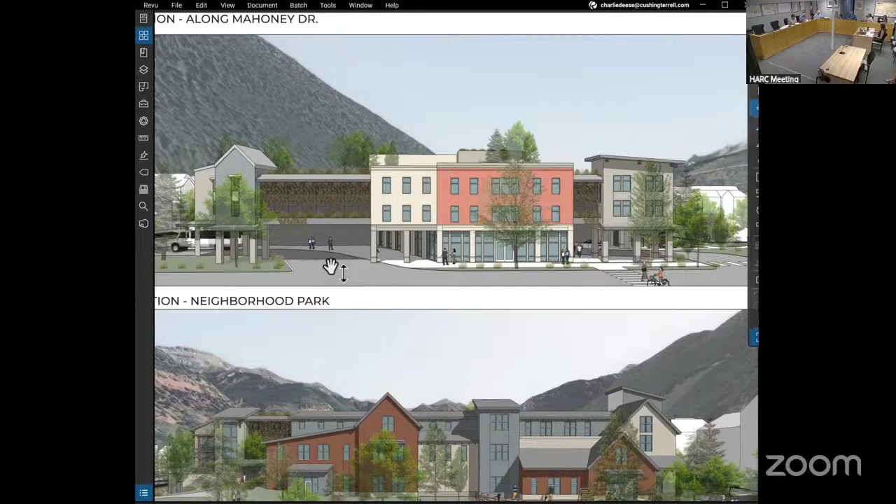On that top elevation there, I think that's the one where there are, yeah. I'd like to go to a different one, but there were. And then I'm gonna ask the big question. I'm gonna look at these drawings, they aren't labeled, but it's the 3D view of Mahoney.

Okay, so what I see is adding the mass and scale significantly. As you go down to the right, you see that big appendage, it's 3 stories sticking out, or even beyond that. First of all, as Stacy said, it needs to be set back, but there's appendages at 2 stories in front of it. And there's another spot further to the right, I guess it's the west, that are appendages that just keep adding the mass and scale.

So those need to be removed and the 3rd floor set back. But let's go back to that top rendering. Mark, can you elaborate on that? Yeah, I'm a little lost on it.

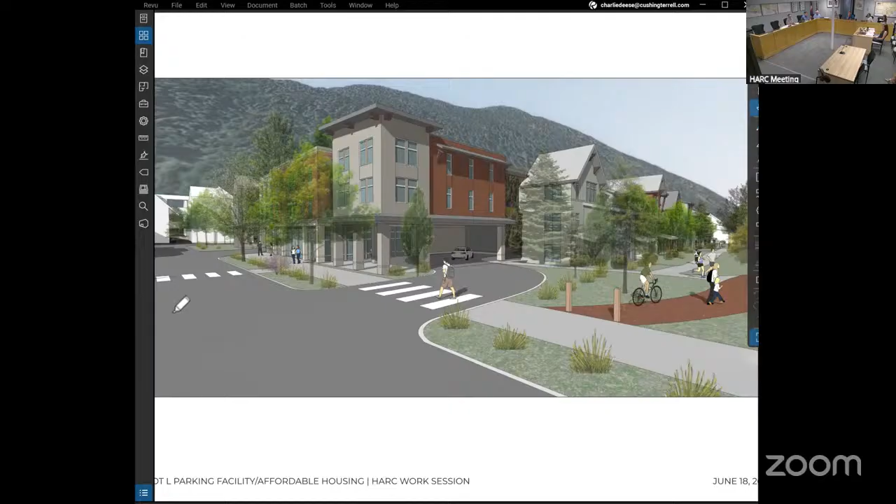I'm talking about that appendage on the right. You can't see it behind the trees. There's another view that isn't hidden as much by the trees. There are 2-story appendages, there are 2 of them along that side that just keep adding the mass and scale even further. Or it's stepping down.

Stepping down is the way I would... I think that particular rendering view is a little unfortunate, the way it seems pronounced, but other views make it seem like these are... Well, I think they need to step back on that 3rd story, but I think these need to be eliminated because it's just adding to the mass and scale out front. It's not accomplishing anything, and it's coming closer to the river trail, which they wanted to avoid.

But here's my big picture question. Everybody is saying the guidelines require 50-foot runs. You've got parking in the middle of this, which you're trying to hide and disguise, which I appreciate, and plus get more affordable housing units on any project we do.

But it seems like there's 2 choices. You could put 2 stories underground, or 1.5 stories, or you could divide this into 2 parking garages that almost have a 20-foot or 30-foot corridor between the buildings and separate these buildings. I actually drew lines in here with help from the guidelines, 3 building separations on this long. How many feet long is that, Matt? I think maybe from your measurement.

Let's ask the applicant. How many feet long is this? 600, 500 feet long, what is that? The garage is 284 feet long. 284 feet long, and here we are supposed to be having a break every 50 feet.

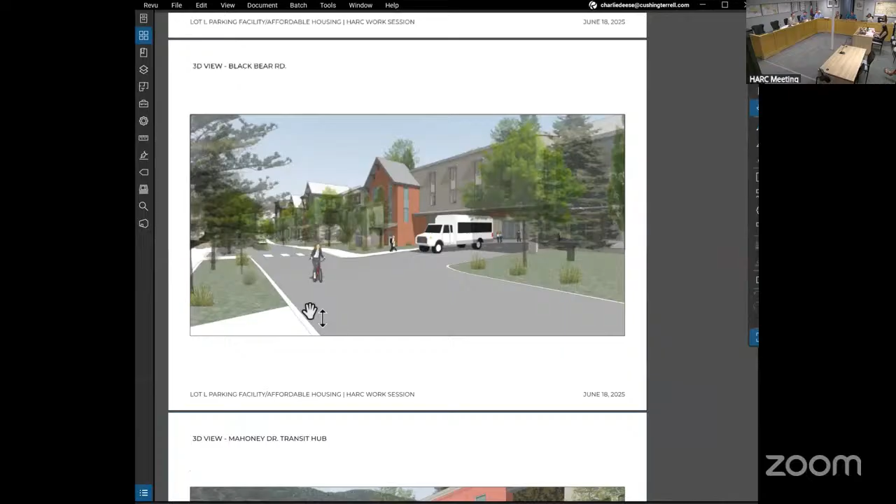But I might be persuaded, in this neighborhood, if the building was divided in half and there was like 20 feet of open park area between this massive structure. Well, actually that garage is 284 feet long, but how long is that elevation from the end of the housing units to the other end, going east to west? That adds another 20 feet.

Oh, is that all? Yep. Okay, well, still it's 304 feet, 304 feet. So you could divide it up and have a parking garage left and right, but they're separated, and you'd lose about probably 3 stories above ground. It depends if you have 2 stories underground, but you'd have at least 3 stories you'd lose, probably 50 parking spots. You'd have to figure out how to gain that back.

So without a break, okay. Let's see if I have any other questions. No.

Let's hear from the public, and then let's try to galvanize around what we would suggest to do with the guidelines, and work with Kristen to bring this back as something that's viable and not so far off. Matt used the word, it's grossly oversized, and it's because you're dealt with a program that needs to be adjusted somehow. Maybe there's another place for a smaller garage, like Silverjack, somewhere in one development, but anyway.

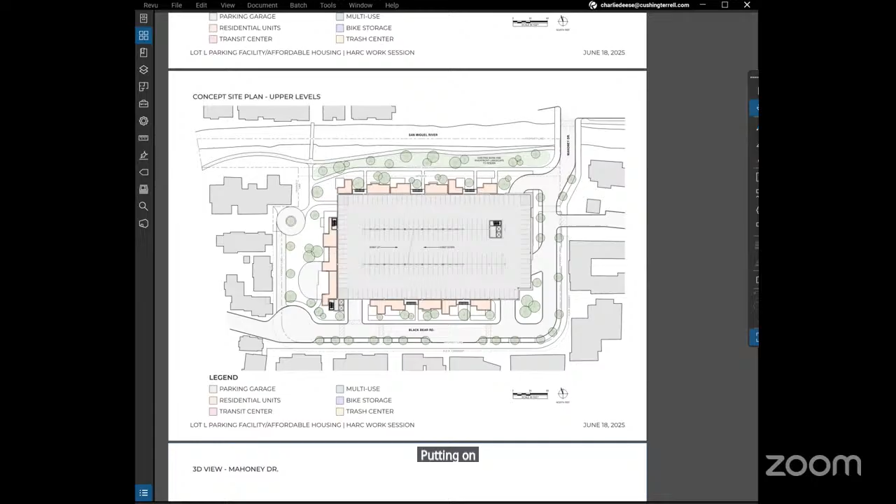No other hands raised. Okay, so would the applicant like to respond to some of these comments? And particularly, I would ask you to give us all the dimensions of that park or open space.

It really depends on where you measure it, but 80 to 120 is kind of the variety in there. At our narrowest point here at the north, we're a little closer to 70. I think we're looking at around a third of an acre, depending on where you cut it for that park.

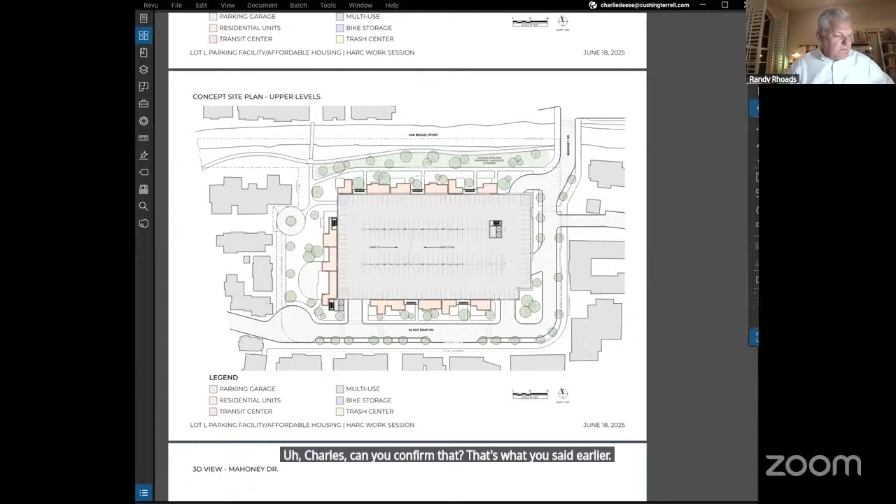Okay, you say a third of an acre? Charles, can you confirm that? That's what you said earlier. Yeah, I think so, roughly. Okay, that's about right.

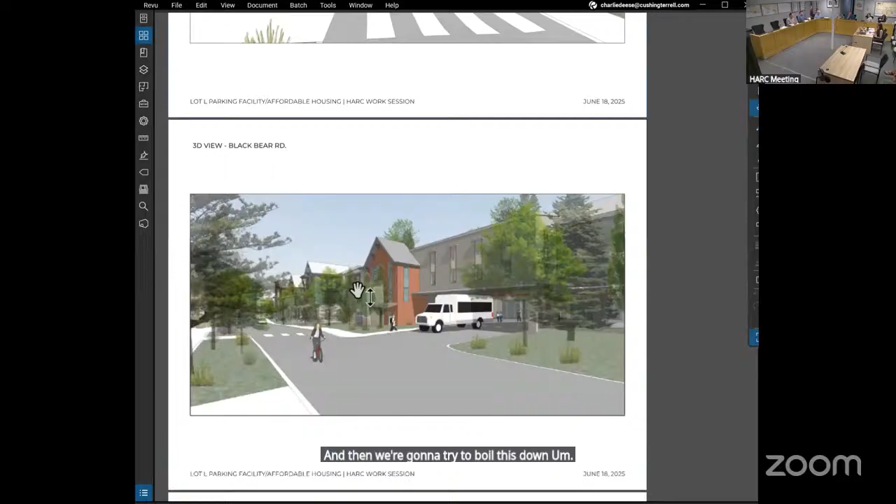You could put the south elevation back up there. Sure, we're going to try to boil this down. First of all, I got to ask a question, because if we're going to give them some guidance here—we're not trying to design it, but it's a work session, so we can be more free-flowing to help, see if any input we might have or ideas to make it viable.

So would the board think that if this was, of course, 2 stories underground parking, would make all my questions go away? Not 3 stories like Vail, and not 3 stories like Steamboat, or I think Aspen has a 3-story garage, but 2 or 1.5.

But would the board think that if this building was cut in half, this 304-foot run, and there was like a 30-40 foot gap in here, so it was 2 complexes, and they'd have 2 garages that were separate from each other—I guess the above ground could work, and 2 below ground could be fully viable. Would that be enough to break up this whole 304-foot run?

Would you think in this zone district, or would we say that the guidelines would say, well, they do say every 50 feet have a break, but that doesn't mean necessarily cutting all the way through? Cutting all the way through, yeah.

But with one break in the middle, cutting off of 304 feet—or we can give them something—would that satisfy us with a 30-foot open space, the traffic, the cut-through for people walking, green space, losing 50 cars? Of course, if you have 2 stories underground, you wouldn't lose 50 probably, and it'd be 2 separate garages inside this then, which is inefficient construction, but is that enough of a break?

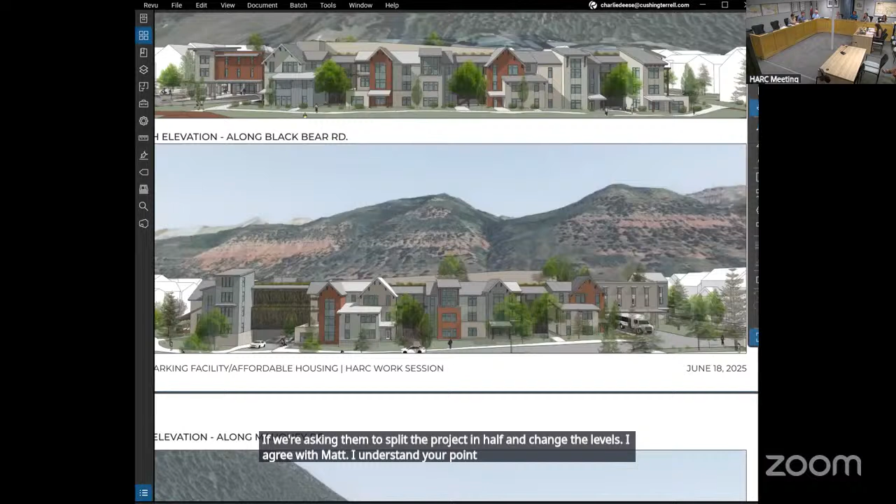I agree with Matt, I understand your point. But to me, they need to delete them and step back to the 3rd floor, as Stacy said. It's just getting too close to the river trail and we don't have to give them that now.

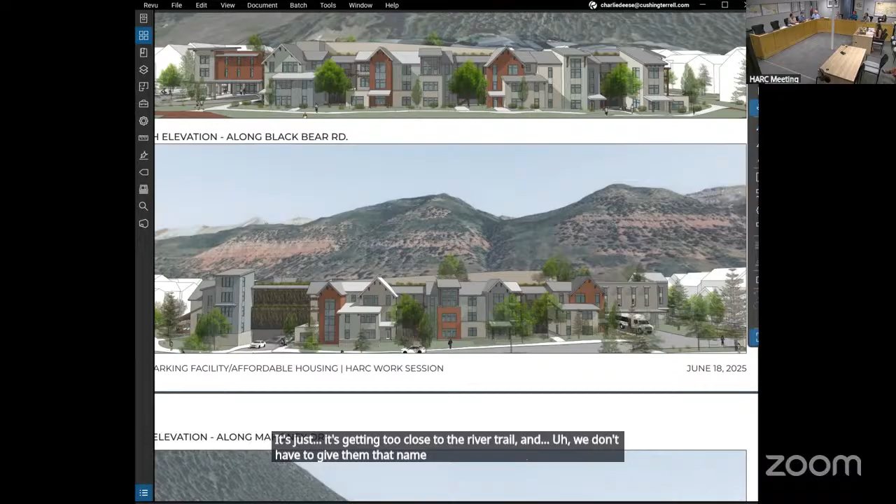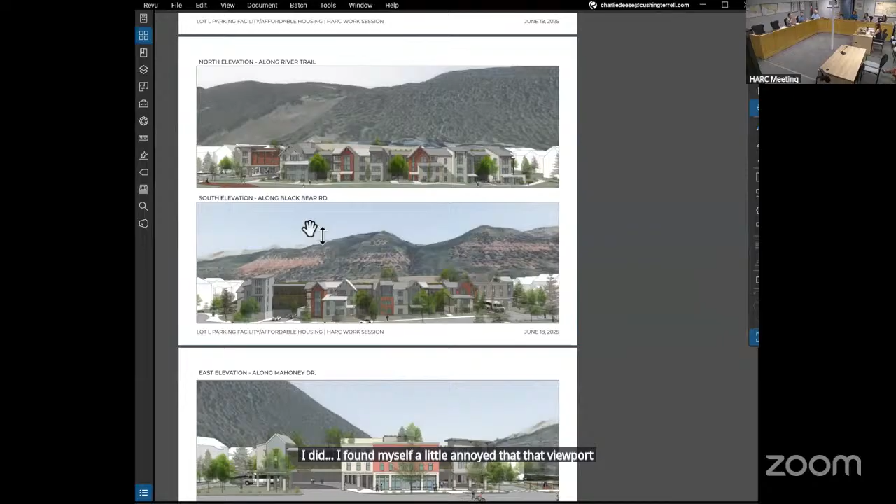Well, I expect more detail with regard to that later. What I do see is there's a sidewalk, which I think we're all perceiving as the river trail, but it's not — the river trail is considerably further north than that. I found myself a little annoyed that viewport wasn't stretched a bit more toward the river trail so I could see it.

Okay, well it's there if you look hard for it, but we're going to hold on that item. The next item was substantially set back the third stories, compliant with the guidelines. Kristen has already cited all the guidelines, we don't have to tell you what they are — I was trying to just get it down to a page instead of 4.

Would we agree there should be more, per the guidelines, 1 and 2-story elements rather than just little corners? Yes, okay, more 1 and 2-story elements. Kieran, you agree with that? I do. Thank you, just making sure you're still with us. Okay, touche.

In keeping with the idea of maybe separating into 2 buildings: positive open space — A, create places with distinct identity within, and D, provide positive open space within. It says it twice in the same section. It's strong, I mean this is not our imagination, we're not making this stuff up.

And then the last one, the most important one, is to break the building on that north elevation into 2 different buildings with 2 different garages.

There's one other thing we didn't spend much time on - pedestrian scale, using decks, porches, bays, and balconies. I counted 3 or 4 on a project of this size. That certainly helped with the mass and scale and the step backs, and increased the use of decks.

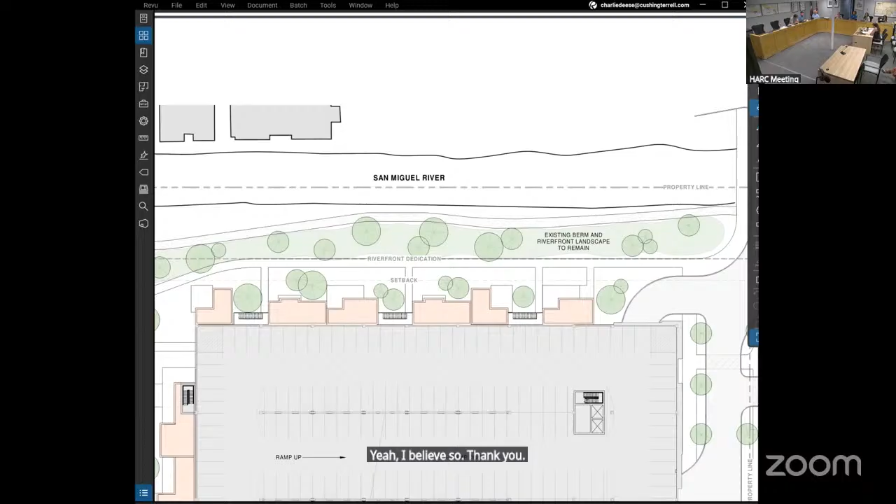Yeah, I believe so. Okay, well, thank you. This is a tough situation with that program and there's been lots of suggestions. I'm sure town will look at the big picture - what, could you put 800 here, 100 somewhere, whatever. From now on, we're only going to talk about the guidelines, and unfortunately we can't help you anymore. You're on your own and have to get back to Kristen, and please come back with suggestions.

They should come in with another work session, or you could have another work session. Because it's so far off, maybe that'd actually be a good idea - we could cut the number of hearings, might actually work yourself ahead in the schedule. But we're all trying to help, and we're clear and unanimous from the get-go. We don't want to dribble into this and at the third meeting decide, well, okay, now we'll do this.